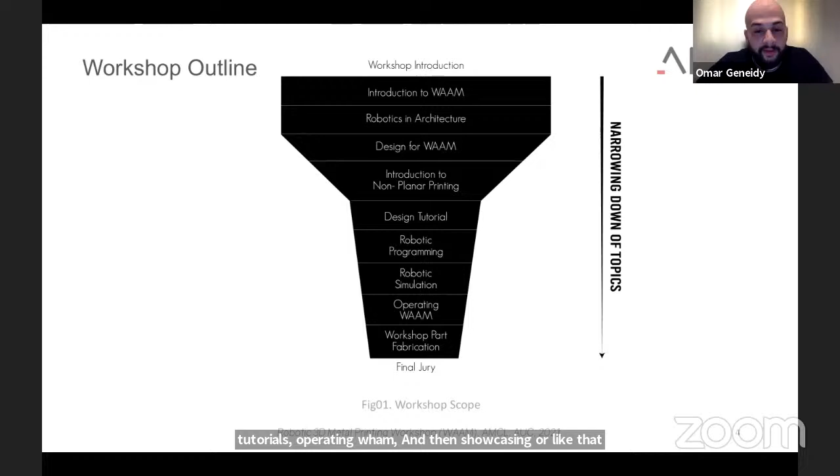Then we started digging into the tutorials: design tutorials, robotic programming tutorials, robotic simulation tutorials, operating WAAM, and then a showcase or lecture about the actual part that we fabricated at the lab.

This was the schedule. It involved two planned breaks for the participants to work on their projects. This was a hybrid workshop, done both online and at the lab.

So this is our lab. We have these two robots here: one that does the wire arc additive manufacturing, WAAM, and we have the positioner here, which is considered the third robot.

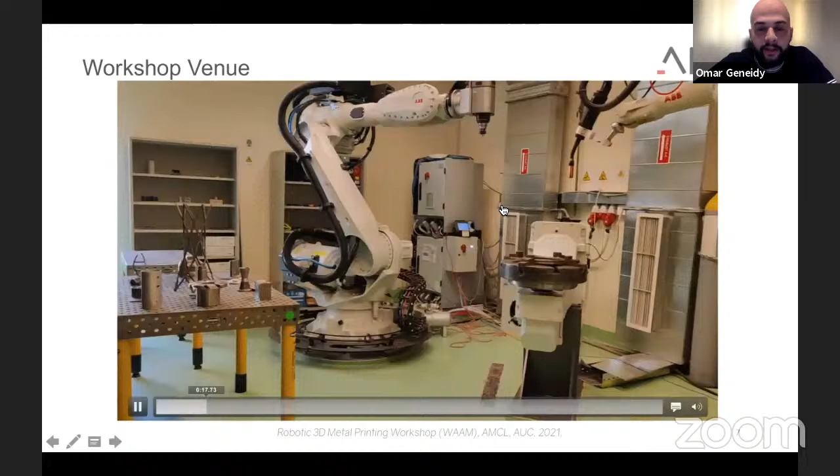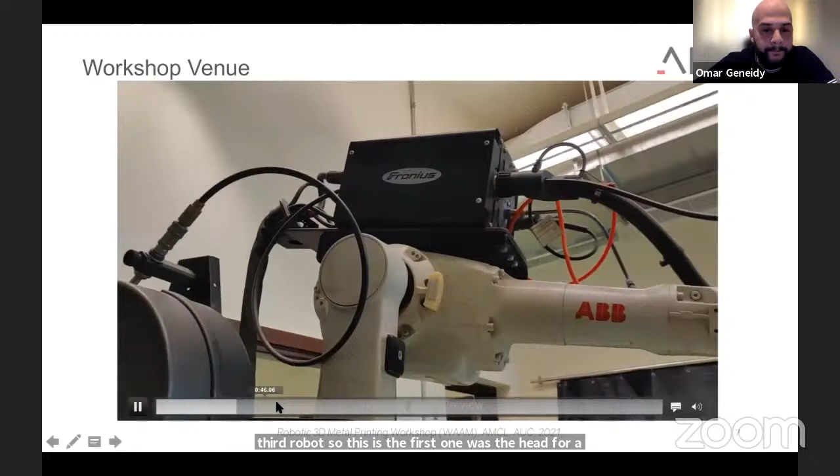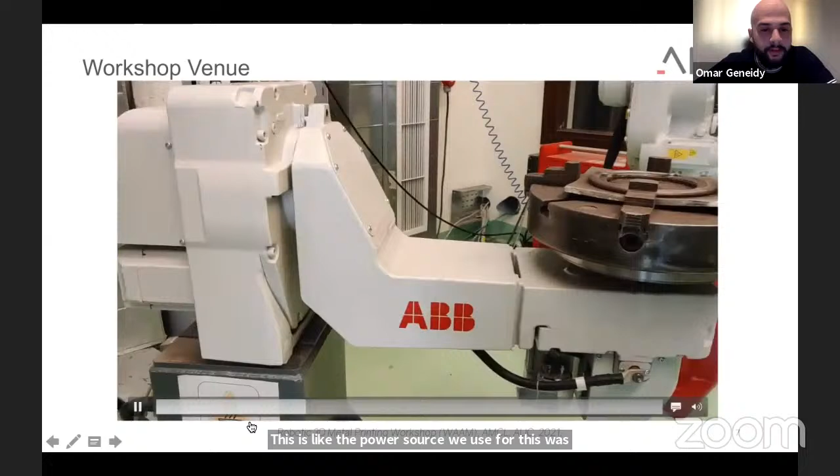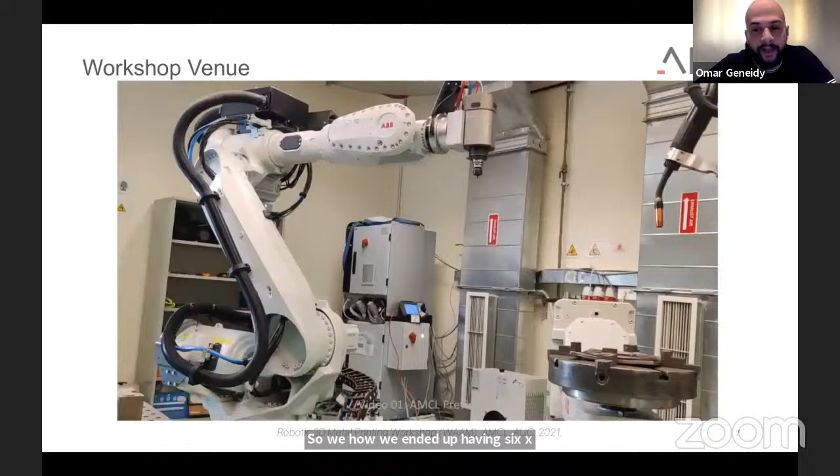This is the first one with the tool head for the wire for the WAAM, and this is the power source we use for this robot, and this is the positioner we use, which adds 2 extra axes for our integrated system. So we end up having 6 axes from each robot and 2 axes from this positioner, adding to our degree of freedom. We also have another robot which works as a subtractive robot, doing milling and surface finish for the parts that we print using the other robot.

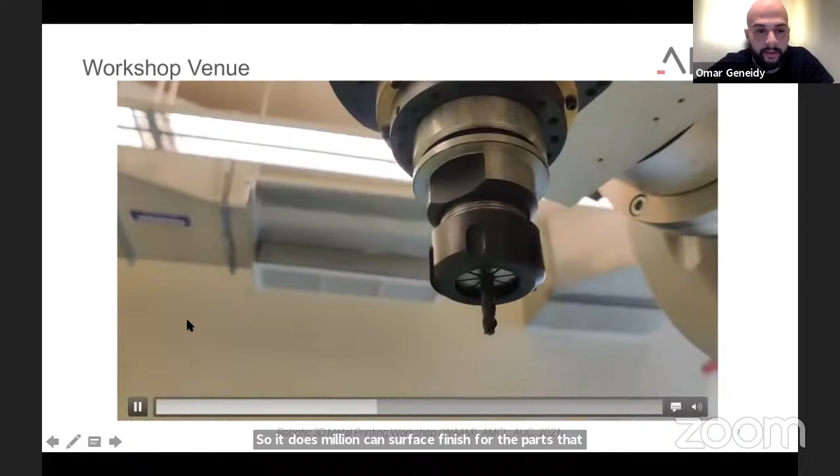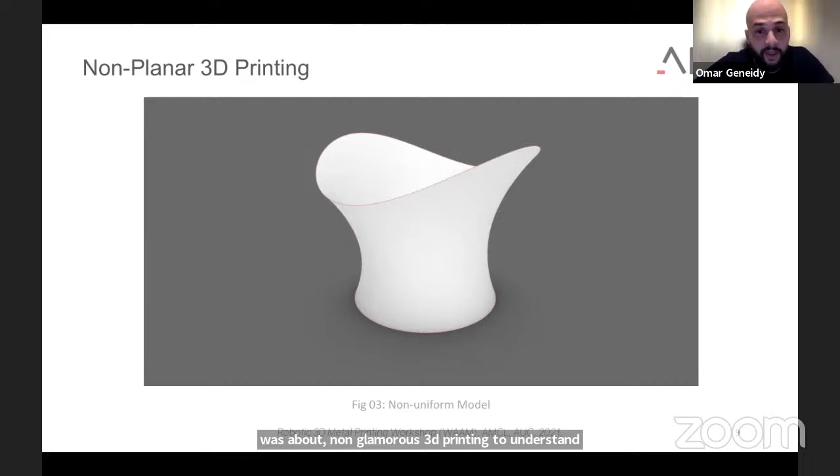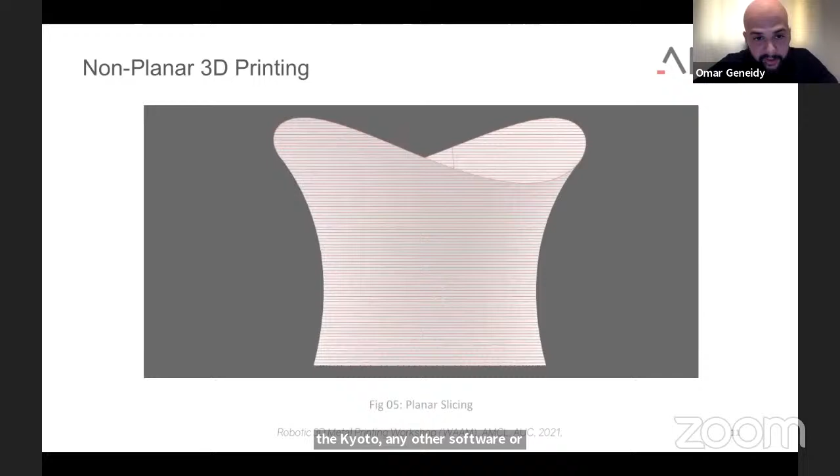So the main topic of the workshop was about non-planar 3D printing. To understand this, if you have a shape like this, you have different ways to do the slicing. The first one is planar slicing, the normal method you'd use in software like Cura for normal 3D printing. But the problem is that you end up with layers that start and end in a way where you have more layers in one area than in another, which creates problems, especially when working with WAAM, at the start and end of each print.

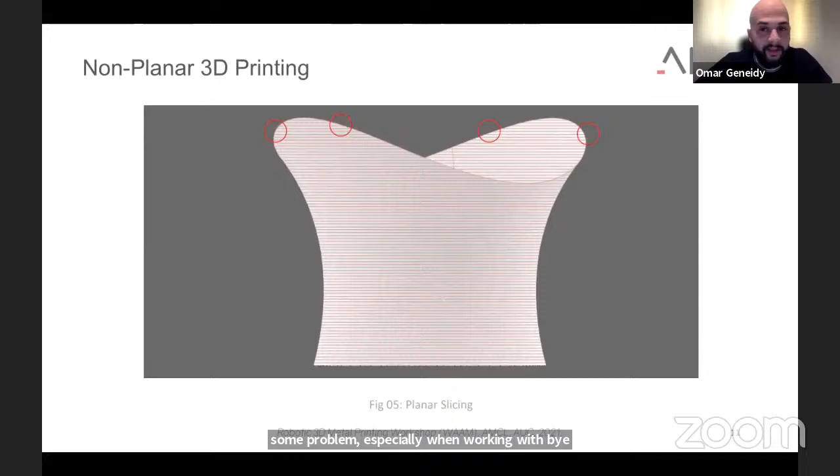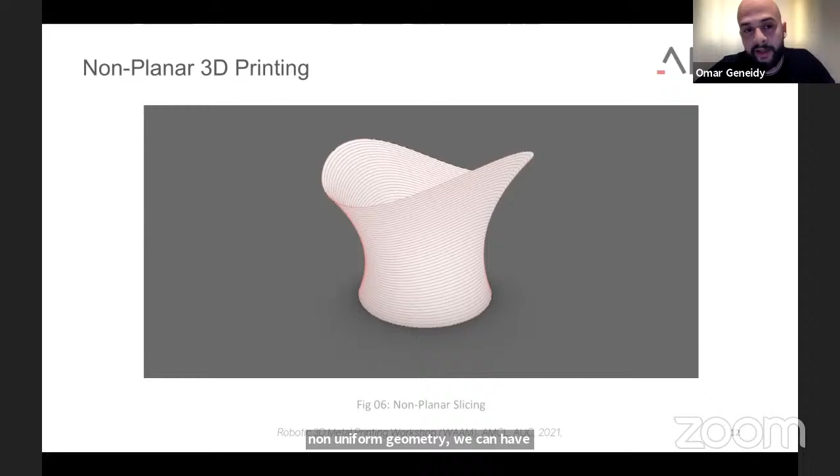So we try to introduce this idea of non-planar 3D printing by varying the height of each layer we print, so that for the same non-uniform geometry, we can have variation in heights without having to change the total number of layers inside it.

Of course, this is not a new idea, but it's there in concrete, it's there in clay, it's there in plastic. But when you're trying to do this with metal, it's very, very complicated due to the parameters and all of the stuff involved. So this was the idea that we were trying to dig deep into during this workshop.

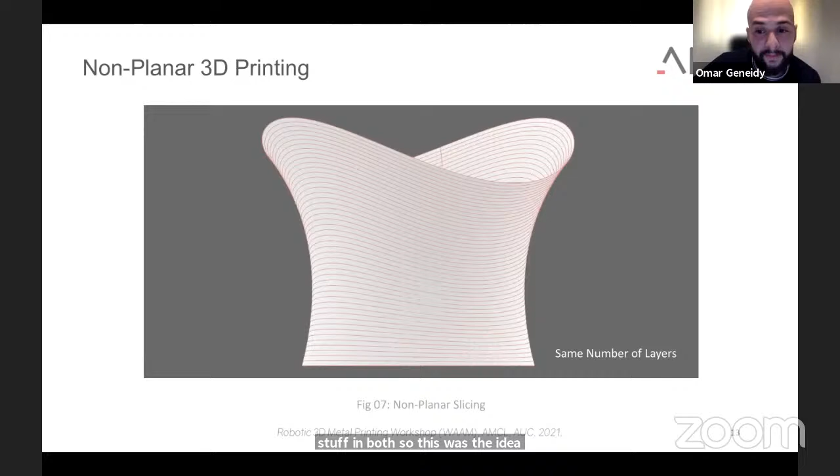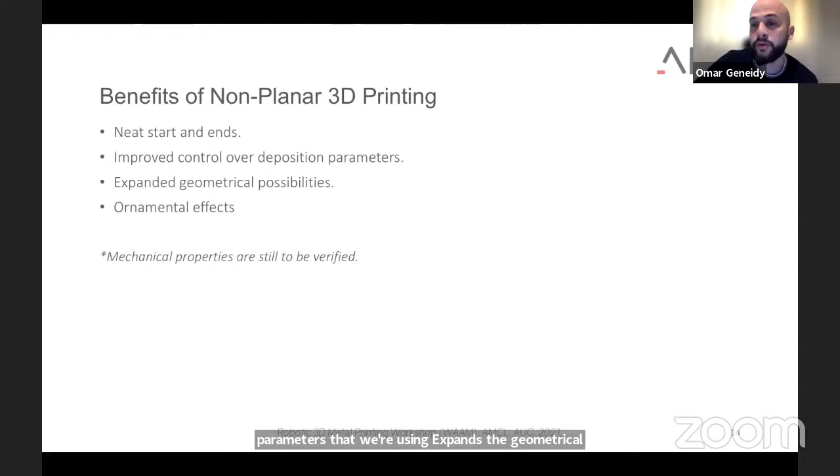It has a lot of benefits. It has neat start and end. It has improved control over the deposition parameters that we're using. It expands the geometrical possibilities, and it can also add an ornamental effect. Still, mechanical properties are to be verified as part of our research in the lab.

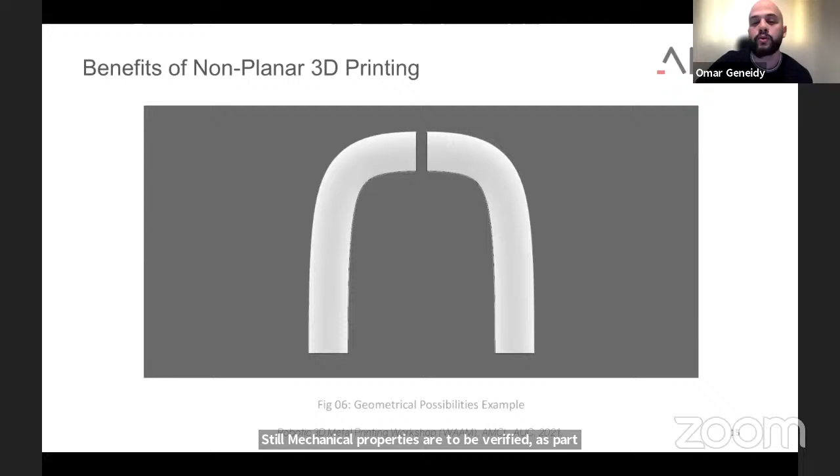Just a very quick overview of the geometrical possibilities. So if you have a shape like this, a tube, if you're doing a planar slicing, this is how you will end up slicing it, all of the layers parallel to each other. You will face problems at this part here, because you will need supports to do that. You can instead do it this way, so you have the layers sliced in this manner, and you will be able to print this kind of shape.

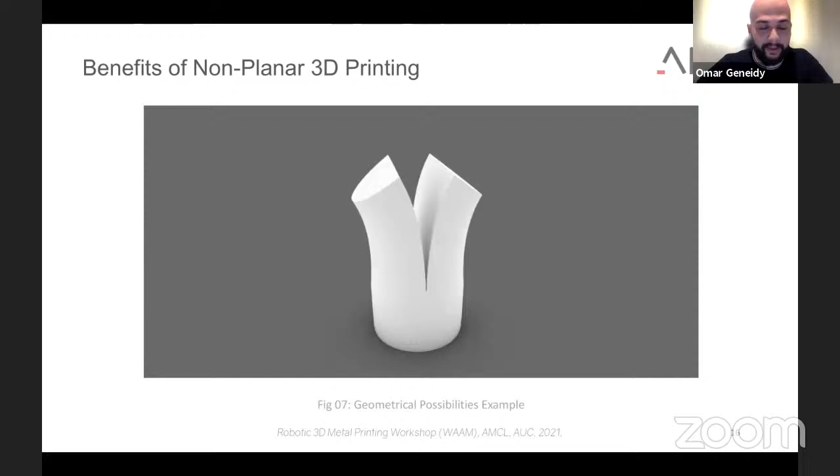You can also do some branching effects, and it could be mixed with planar slicing. I'm not going to dig deep into this because this was a whole session about this.

As I mentioned earlier, there's a difference between clay and metal, and why metal is far more difficult to achieve this with than clay.

Just a quick overview. In clay, you can slow down the robot, or you can elevate the tool head a little bit, and you can deposit more material, and it will fill the gap between the tool head or the nozzle and the print surface or the layer beneath.

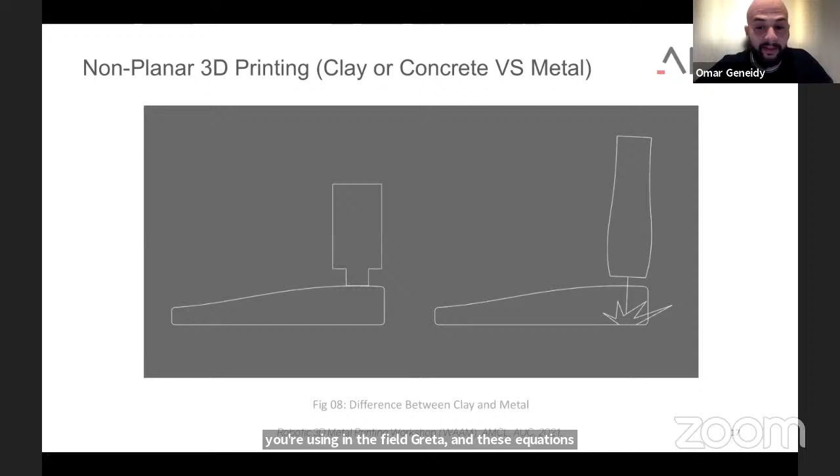With metal printing, the arc starts at the bottom of the layer. So you have to have the parameters or the data that generates the layer height that you wish to achieve. It has nothing to do with the height of the nozzle. It's all about the electricity that you're using, like the current, and the feed rate, and these equations that happen together, and the material that you're using. So this was why it was tricky.

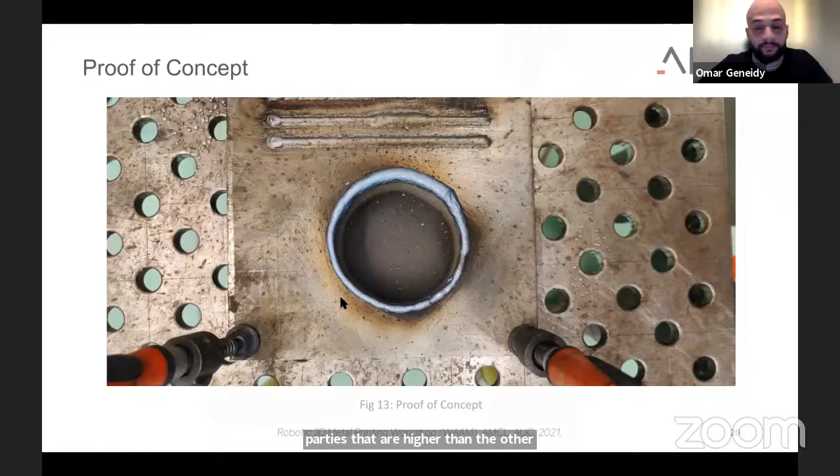During the workshop session, we started with Professor Hanadi talking about WAAM, what is WAAM, and talking first about additive manufacturing, then WAAM, and why WAAM, and all of the things related to that.

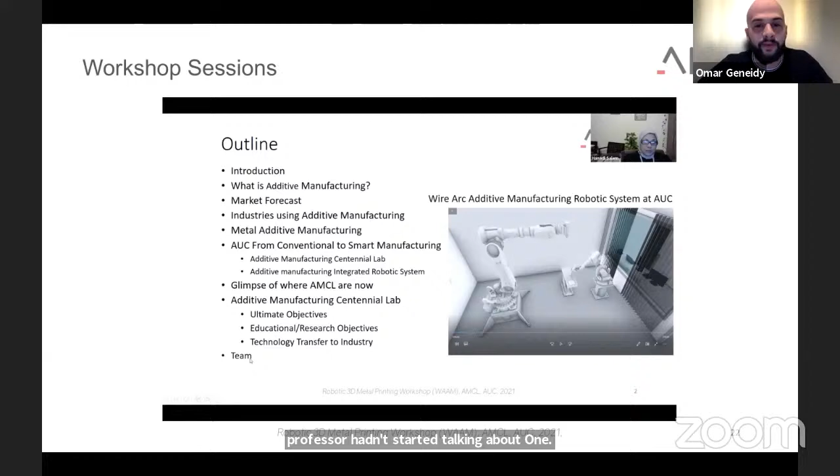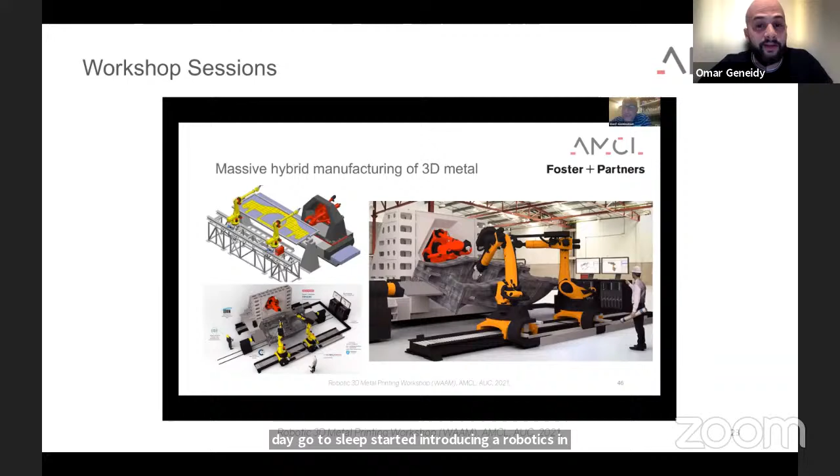And then the next day, Dr. Sharif started introducing robotics in architecture, and at the end, showing the potentials of using 3D metal printing in architecture.

We then started having Grasshopper sessions on the design, how we can design non-planar parts, and we did a quick revision on data tree structures, and then started working on robotic programming inside Grasshopper, two or three sessions on that.

And how we can optimize the robotic movement. So we're using this positioner, and this positioner rotates in two axes. So how we can use this to complement our fabrication process, making it much easier and optimizing our movement.

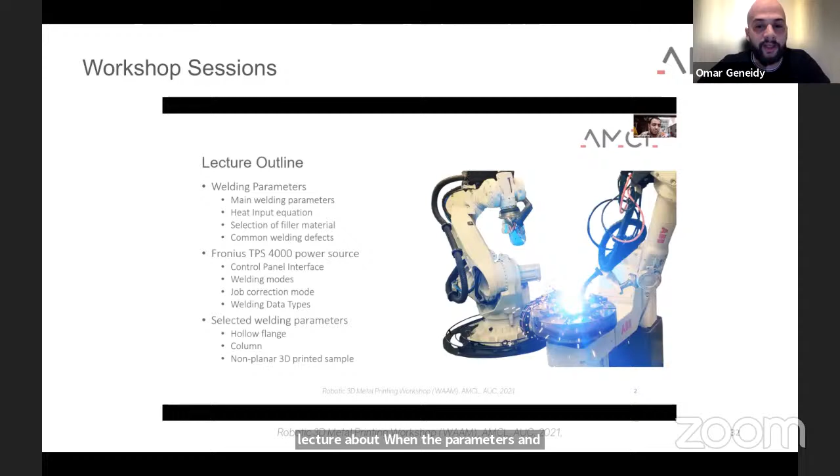Also, Engineer Ahmed gave a lecture about welding parameters and the power source we're using, and how to select these welding parameters, and also some instructions about how the robot moves in one line of code from one point to another.

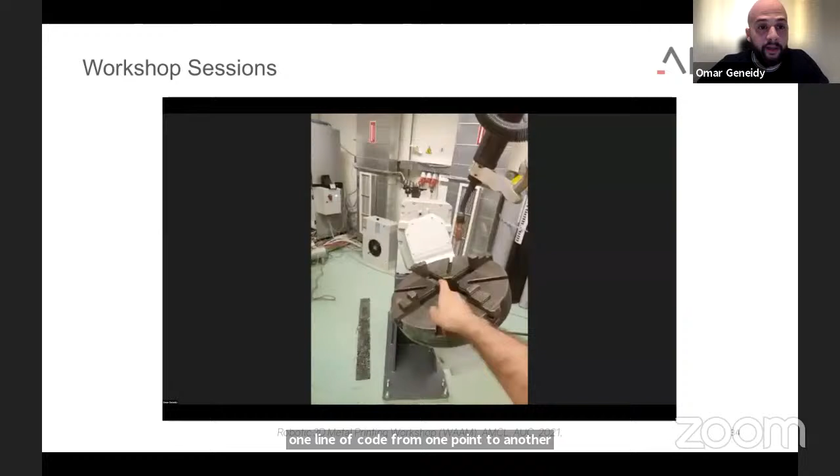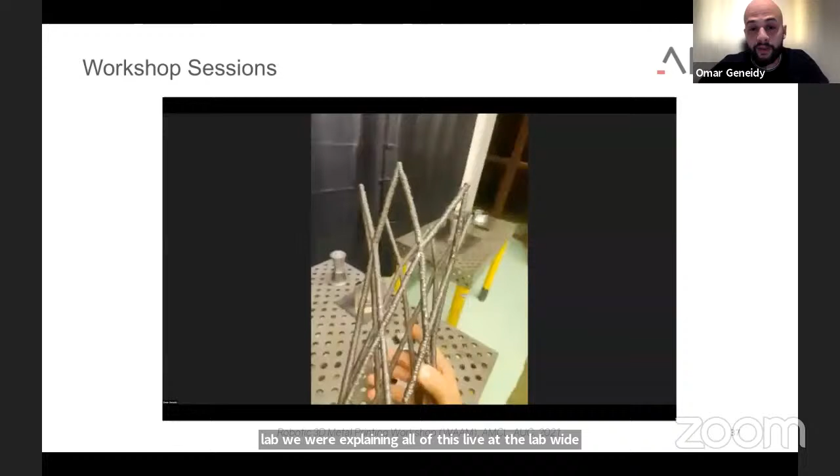And then in our live sessions from the lab, we were explaining all of this live at the lab while running the robots, and then explaining also using parts that we printed previously and the tools that we used, and talking about the process that we started making during the workshop.

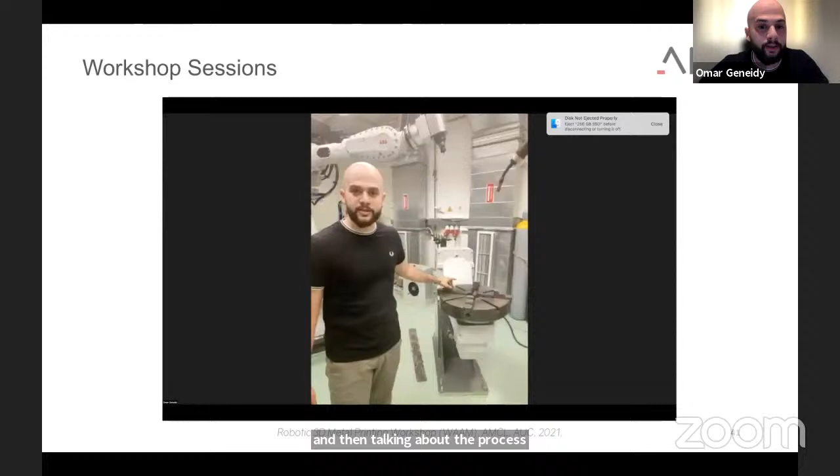We also had another contribution from Dr. Vittoria, who also did her PhD in WAAM, and started sharing with us all of the work that she did. And then many discussions with the participants and sharing of insights. So it was really nice contribution from their side.

So the workshop output, we started printing, depositing this part here.

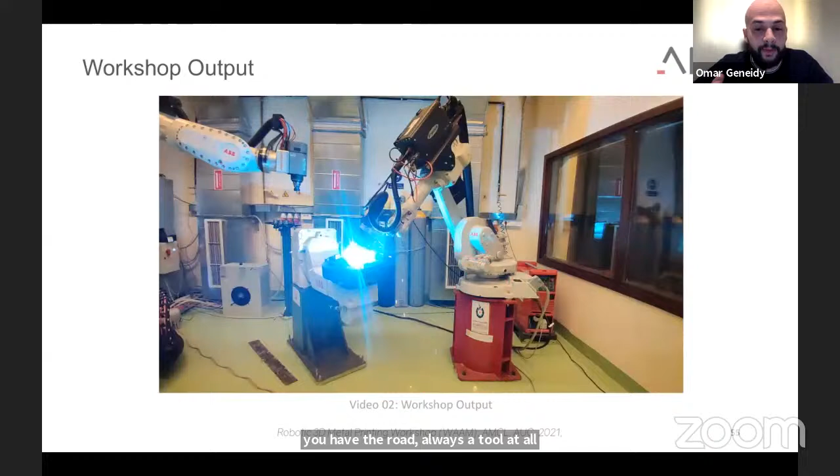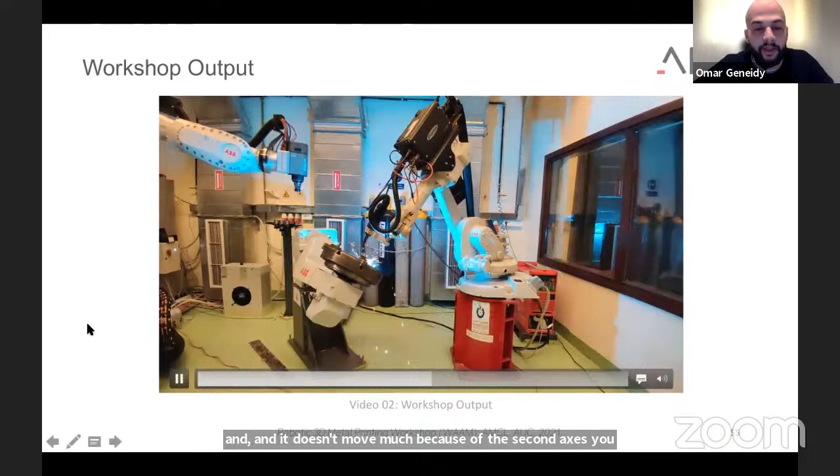So you can see here the robot running and depositing metal, and the positioner working in two axes to optimize the movement of the robot. The tool head is always pointed perpendicular to the layer being printed, and it doesn't move much because of the second axis, which rotates the robot and rotates every target to it, so the robot is optimized as much as possible, making the process faster.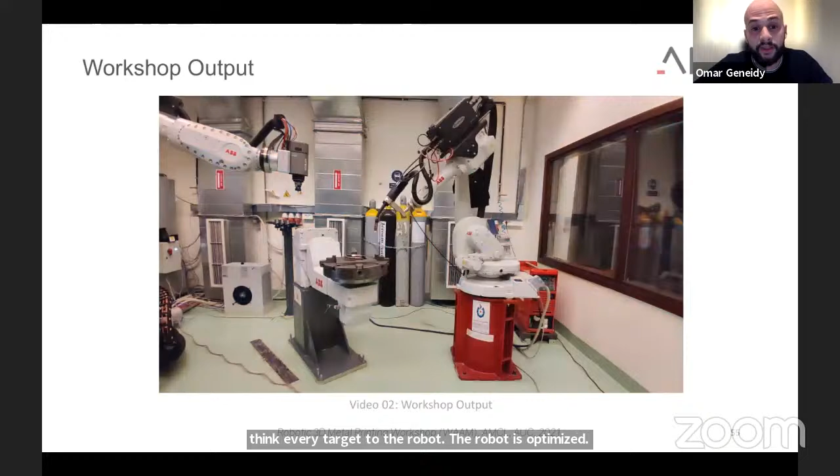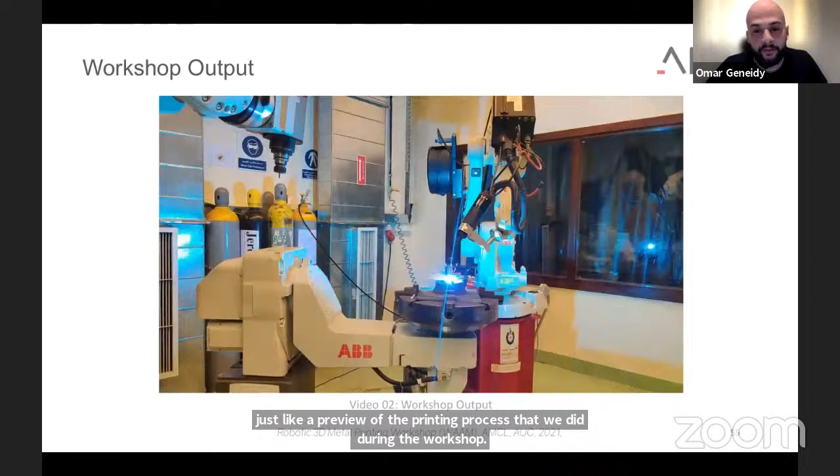This is just a preview of the printing process that we did during the workshop from different views. You can see the layers starting to build up, and the non-planar effect starting to accumulate at the end.

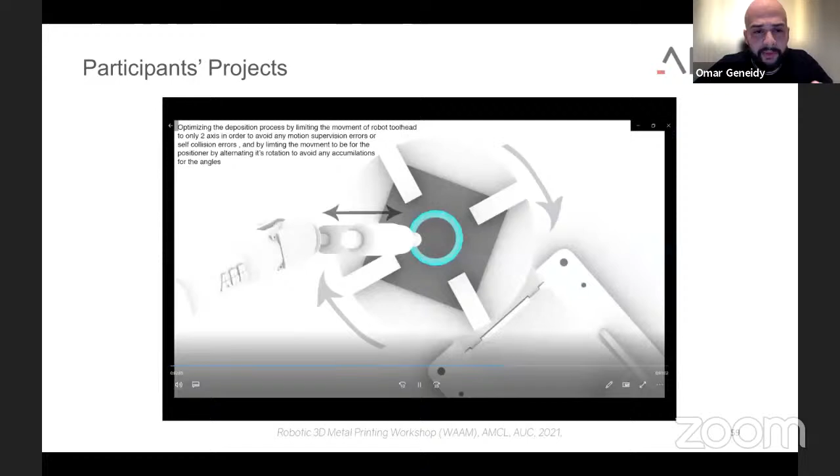We will be sharing more details regarding that in the following weeks. We had every participant working on their own project, so they all designed a piece and then generated the robotic fabrication code for this piece. We had a number of really interesting videos and projects that we will also be sharing later on.

Our next stages: we will have a summary video for the workshop, which will be shared on our website, amcl-auc.com. We are thinking of possibly having a publication about the idea of non-planar 3D printing and including the workshop output as part of this research.

We have another workshop planned coming up here in Egypt, an actual physical workshop, and we will be publishing parts of this workshop as a robotic programming crash course that will be available for anyone to see. Thank you very much, if you have any questions.

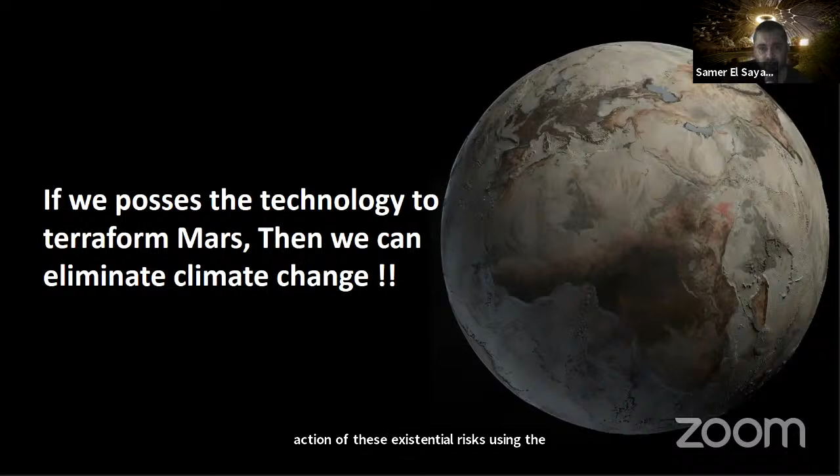Let me dig a little deeper into the design manifesto. I taught during this workshop 3 steps which I define as community-centered design. First, we are inspired by nature. As Le Corbusier once said, nature is always right and the architect is wrong. It's all about emulating models, systems, or elements inspired by nature. Nature is the mentor, nature is the inspiring model, and it gives us solutions to nearly any kind of engineering problem.

Nature is so much older than our human existence on Earth, and it managed to survive. According to anthropologists, our human race is 3.5 million years old, but nature is billions of years old. Earth was born billions of years ago and is still surviving. Our precedents were maybe dinosaurs and primitive life forms, but nature and trees have survived through millions and billions of years. So we have to turn toward these solutions, analyze and study them, and turn them into physical forms we can make use of.

Now the second part: experimenting and developing. We have today very high-value, cutting-edge technologies. I once heard Bill Gates in 2003 with a very interesting quote: the technology that occurred in the last year is equal to the technology that occurred in the last 10 years, and what happened in the last 10 years is equal to what happened in the last 100 years. And all the technologies we invented during our last 100 years are equal to the whole human race's technology and our whole humanity.

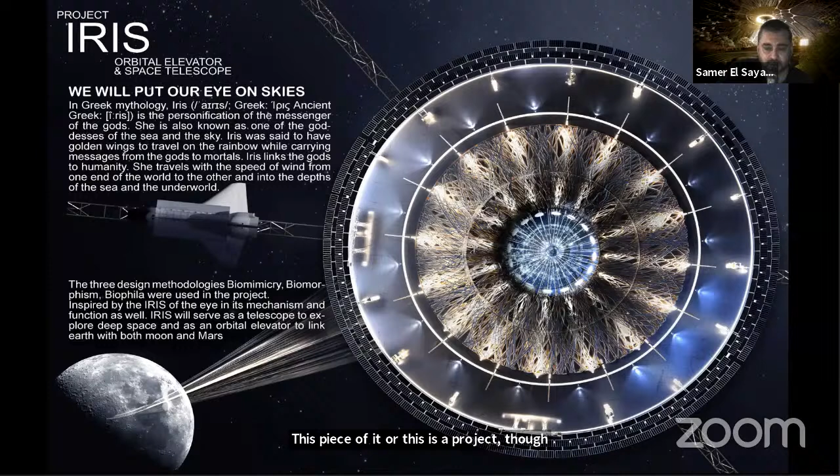The space elevator - this is a project that was awarded in 2020, just about 7 months ago. It is inspired from biomimicry. This project was developed and designed by a mix of digital technologies, biomimicry, biomorphism, and the biophilic.

So the mechanism of opening and closing of the lens - by the way, this is not only an orbital elevator, it is also a telescopic installation or facility that will be serving science and industry at the same time. The mechanism of closing and opening is inspired and developed from the muscles of the iris.

And the iris, by the way, the really fun part here is that one of the definitions of iris was the messenger of gods in ancient Greeks. So the space elevator will also be the messenger connecting different space communities and different human races in different planets and interstellar celestial bodies.

Here comes the second part with the biophilic, creating part of Mother Earth, which will be our ultimate legacy - something connected and hardwired inside our brains that we cannot really leave behind. So the underground part of the same project, the subterranean part on the lunar surface, is designed by importing part of the moon, of Mother Earth, with its terraced landscape.

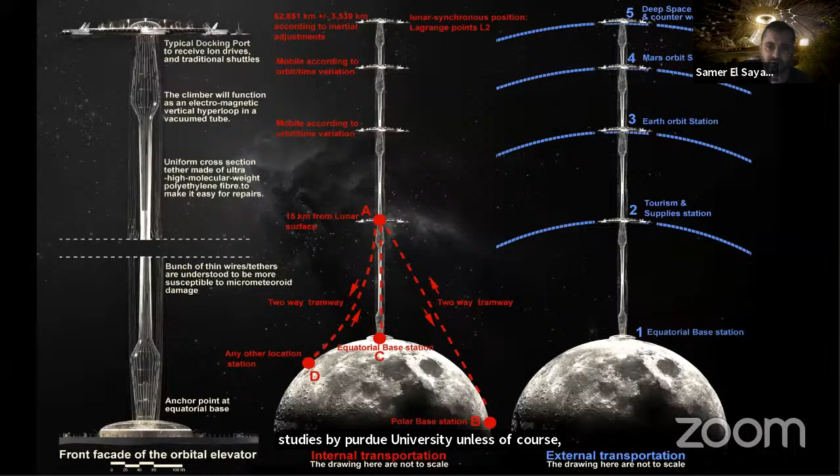It will be an internal and external transportation system: internal on the surface of the moon, connecting various parts of the planet or the moon, and also an external transportation system linking the moon with Earth and Mars, and maybe beyond. The power engineering systems were the really fun and exciting part here.

This workshop has only had a duration of 4 days, and during those 4 days, this distinguished group had succeeded and managed to produce the following projects.

That is a project by Suhaib. Suhaib Rahmani is from Iran, and he has fused time and space. He had this very interesting quantum approach of using time and space by having rotating habitats, producing artificial gravity and stabilizing human presence on the floating, orbital part of the space elevator.

Moving on to Walter. Walter is an experienced architect from Peru. He used the dandelion as a biomimicry approach for creating his space elevator.

I would like to mention that these are very brief slides of the results of the workshop. Each one of them had really dug deep into a very high level of research before generating their solution. We discussed the solutions, and it was very interesting to have the power of all of the minds, unlocking synergies between the group for the end result of this workshop.

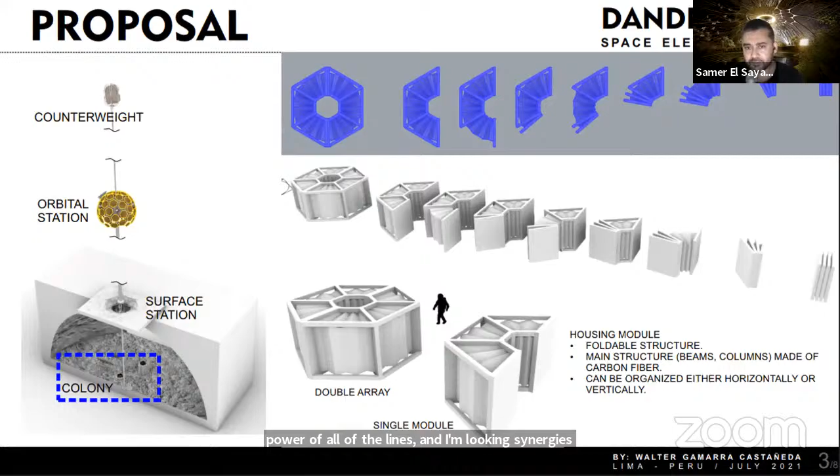Also, Yasmin is a graduate from the American University in Cairo. She had clustered her habitats in a modular and composable design, after understanding the differences between modular design principles in engineering and the composability and synergies that could be done. She went so far as to design the single unit, its air-locking system, its window, and the external structure that will carry and protect the internal unit.

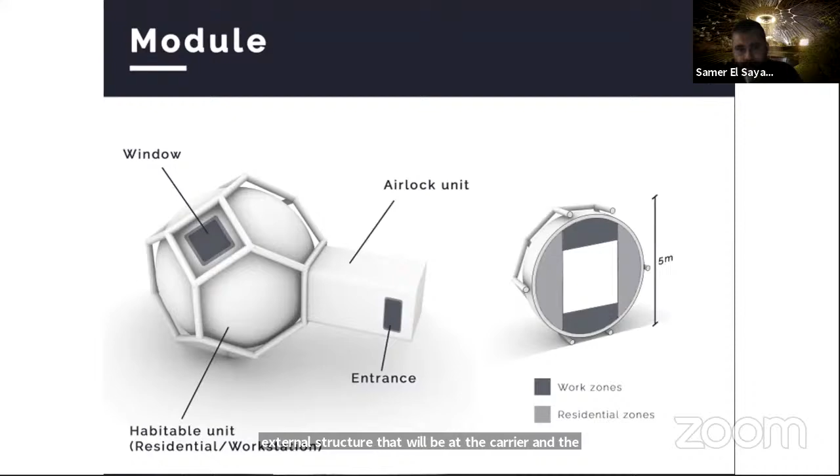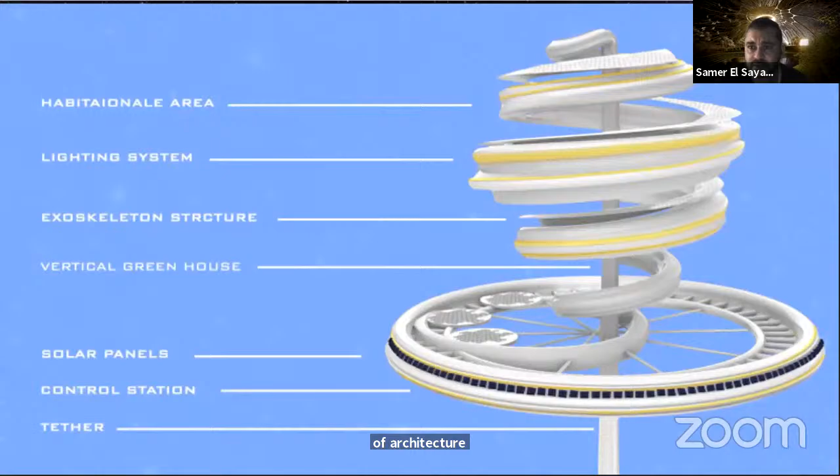And Valentina Pruselli also had produced something very interesting, linking the craters. She went a little bit outside our approach of using the lunar lava caves, and was more interested in exploring the craters on the lunar surface.

We left her the freedom to design her space, but accordingly, she had to dig a little deeper in the research to convince the whole group of the cost effectiveness and the scientific and implementation effectiveness of her design solution. She also thought about the movement mechanism linking the orbital station with the terrain station.

Also, Aline had interestingly made a set of orbital elevators, resulting in a parallel community linked together parallel to the lunar surface. She had subterranean communities and orbital communities with expansion possibilities, done using the modular design of each space elevator, and having a cloud cover covering the lunar surface with these modular units.

Now turning to Ethni Zhu. Ethni Zhu is also a graduate from Yale University, and she interestingly started by thinking about the inner solution of the vehicle that will be linking the subterranean or terrain stations with the orbital stations, and how it could safely host the crew moving at very high speed in a very low gravity environment between both stations, the orbital and the terrain one.

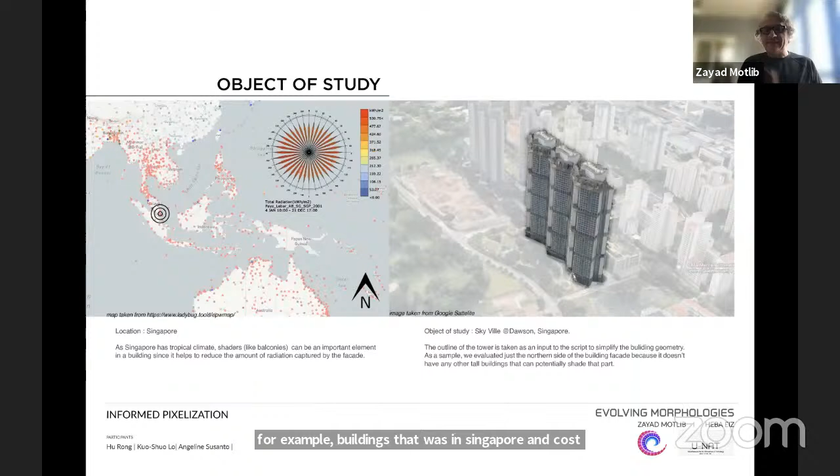Construct a problem. We thought we'd unskin it first, leaving only the structure, which is floor plates and columns, and then design a new skin for it based on particular performance objectives.

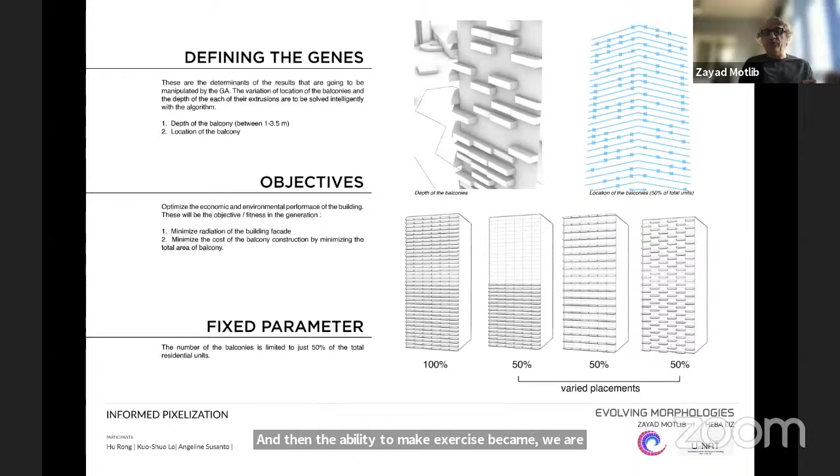In this case, they wanted to reduce the radiation because they thought the facade facing the park, the main important one, is the one that has the highest radiation. The algorithmic exercise became: if we propose 50% of balconies on that elevation, each varying in depth between 1 to 3.5 meters, the algorithm will figure out positions of these balconies with varying depth to give minimum radiation.

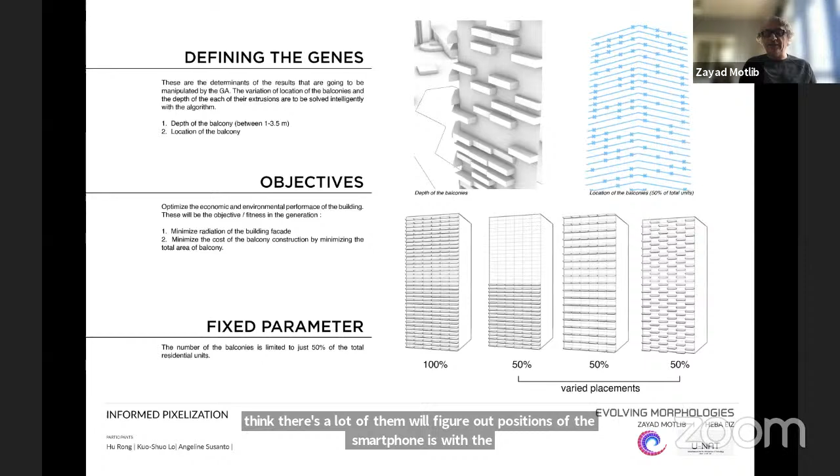So they learned how to define their genes, what are the objectives, and how the algorithm will create different generations, each proposing different balcony positions and projections into the elevation. So it became what looks like random pixelization, but actually it is informed by certain performance criteria that drives the aesthetic or arrangement behind it.

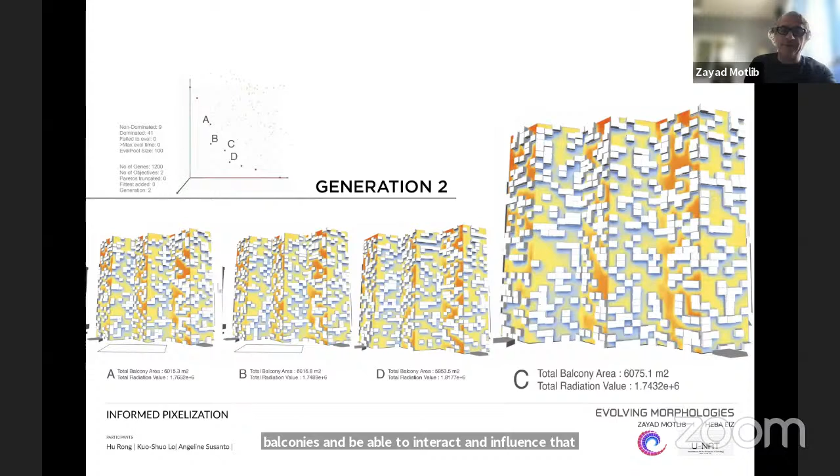So that's generation 1, generation 2. The project moves forward when the subjectivity of the architect comes in and says, I really like that, or I want to understand how the algorithm is proposing the balconies, and be able to interact and influence the project towards something aesthetically appealing. So that would be just phase 1 of the process we're working on.

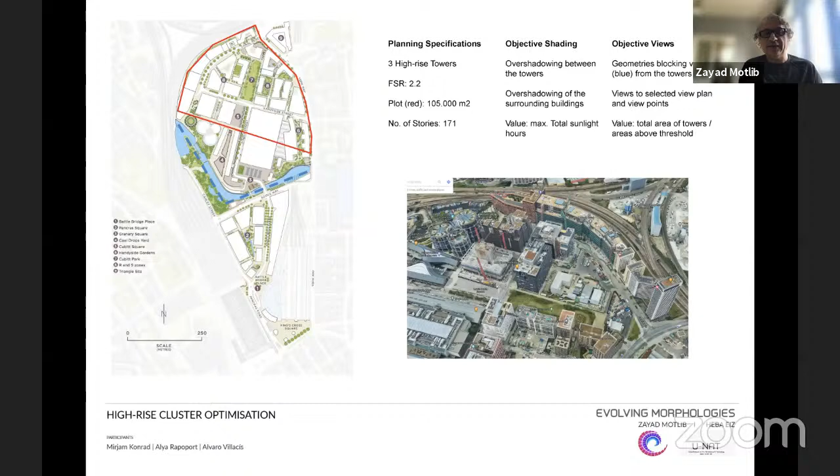The other project moves from a single tower to a group of towers. This time the participants selected a site in London, wanting to propose 3 high-rise buildings. They started with a generic shape, a cylinder high-rise, and the first thing they wanted was for the algorithm to figure out a combination or way of organizing these towers to minimize overshadowing of each other. The algorithm tries different placements and heights to figure out which iteration gives minimum overshadowing.

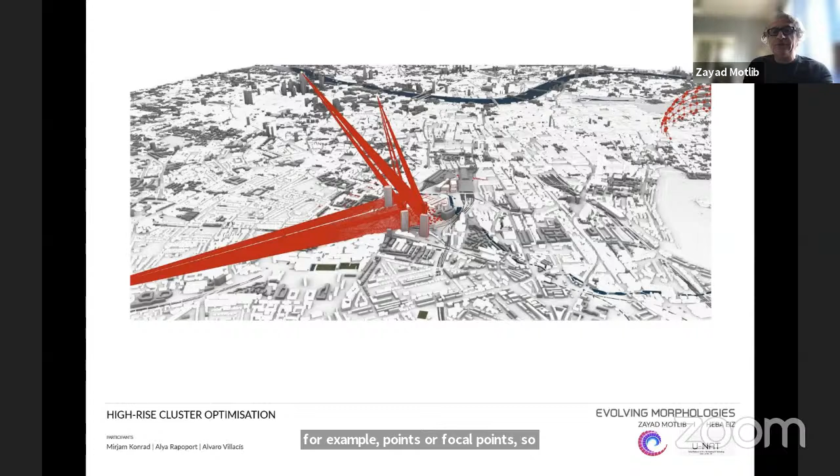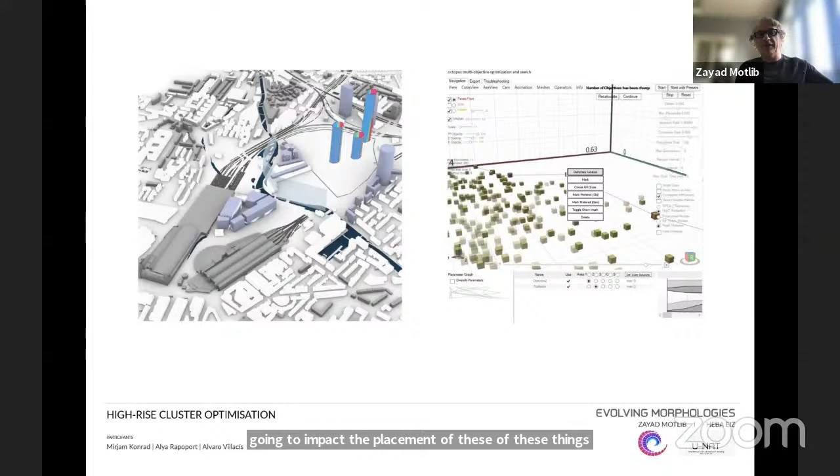With the minimum overshadowing achieved, they introduced another objective: having the best views to certain London points or focal points. So they studied the conflict between overshadowing and views, and how that would impact the placement of these towers, which is very much the first step you take with a project like that.

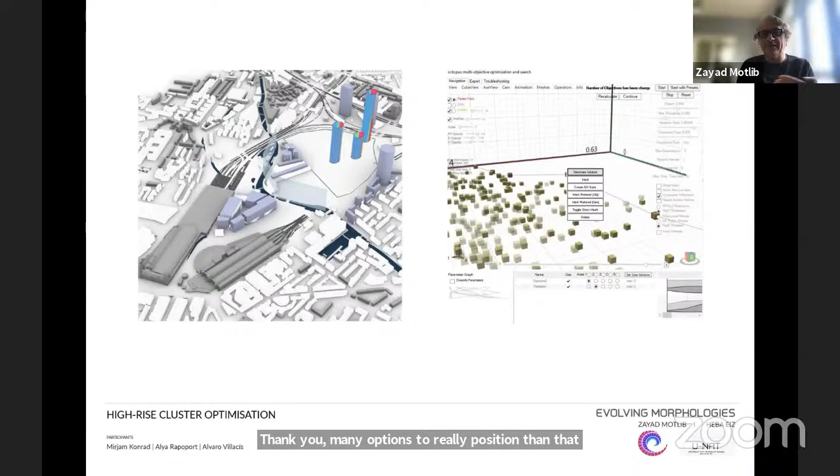When architects do it manually, they position towers in a way they think is best. Here, the algorithm can give many options to really position them, and the architect selects the one they prefer. From there, they take it to the next step, the morphology of the tower itself, introducing rotation and giving it character based on the architect's preferences, knowing the best positions. Now, what is the best morphology that can reinforce their selection?

So from a multi-story urban application, we went to a completely contrasting one: the daylight pavilion, taking a small site, 20 by 20 meters, in a park in Iran, since the participants were Iranian. What they wanted to do is figure out a shape or geometry for the roof, for what is going to be a study hall.

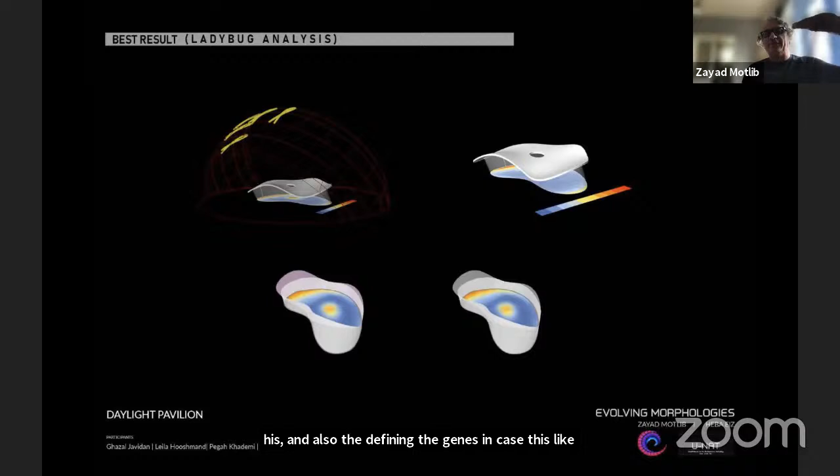They wanted to figure out a shape for the roof with an overhang that gives zero glare inside, so the roof could take different shapes, geometries, and overhangs. What gives you zero glare? So the geometry of the roof, although it looks organic and curvilinear, is actually informed by certain performative criteria. The algorithm tries to optimize this by defining genes such as the cantilever, the height of the roof, and the overall geometry, optimizing it towards producing zero glare inside.

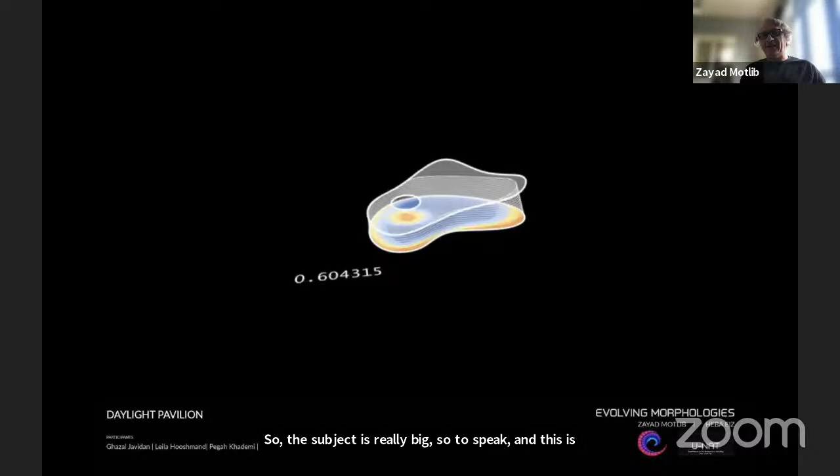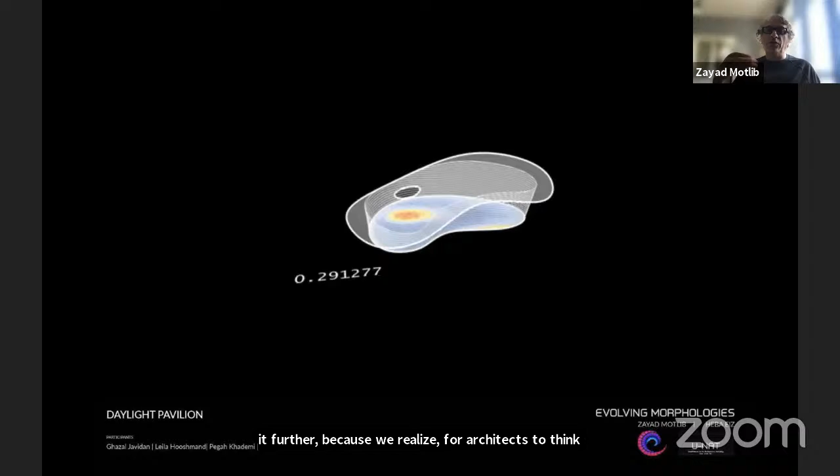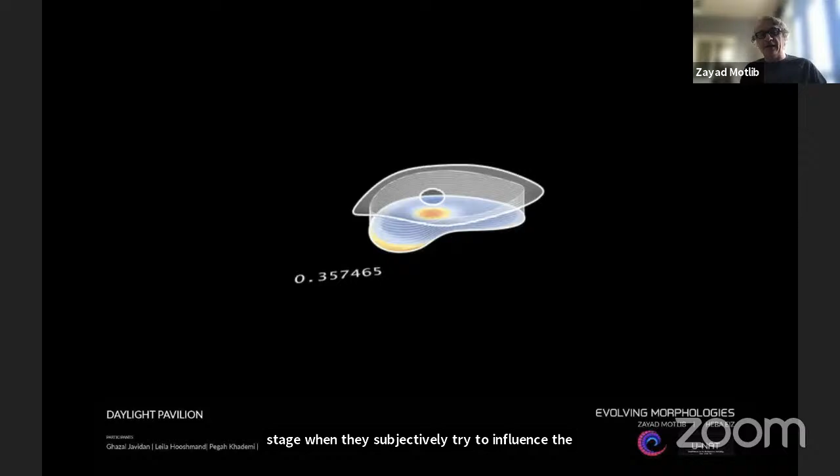So the subject is really big, so to speak, and this is only like one slice at it. We weren't able to push it further because we realized architects thinking of design in a more evolving method rather than generating design solutions immediately took adjustment to the way of thinking of the participant, which kind of hindered taking them to the next stage when they subjectively try to influence the direction of the evolution of the algorithm, and test whether architects can really influence it, how much they can influence, and where that influence is going to take them.

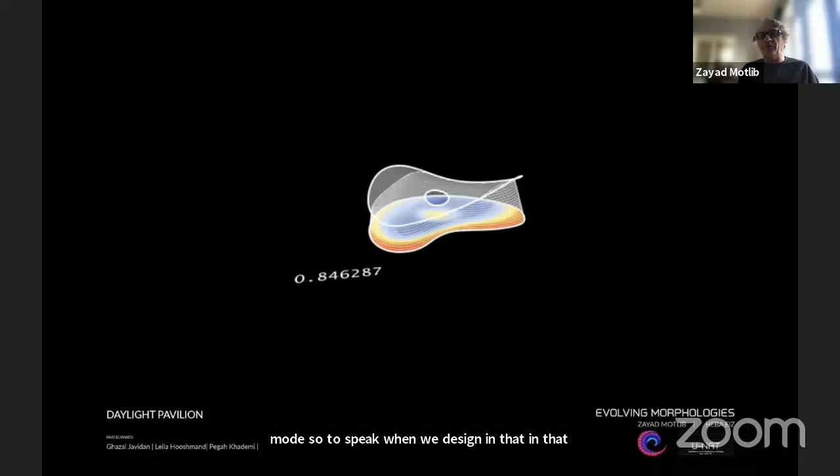So the idea is that we take something very objective, which is the genetic algorithm, and we introduce our subjectivity or preference, which is the dominant mode so to speak when we design in the generative mode, and see where this intersection of two methods were driving the solution towards.

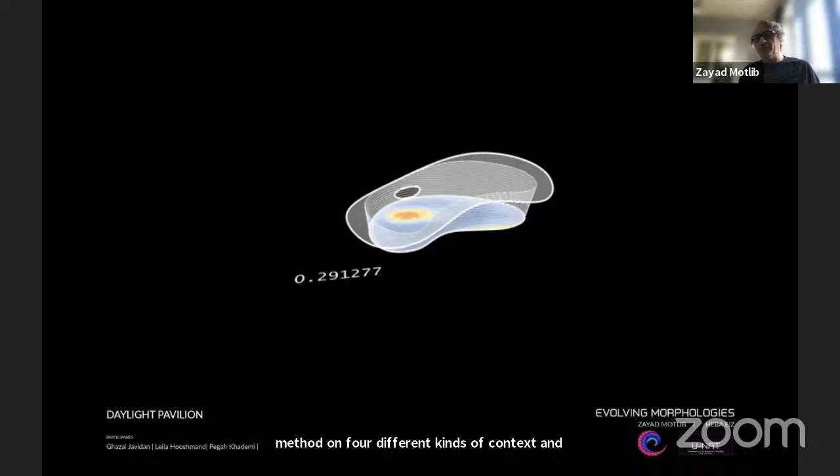As I mentioned, it's ongoing, and it's part of research that I'm currently doing with Heba. That was the first step, testing this method on 4 different kinds of contexts. We look forward to the next version of this workshop when we introduce that interactivity. So I think that's it. Thank you.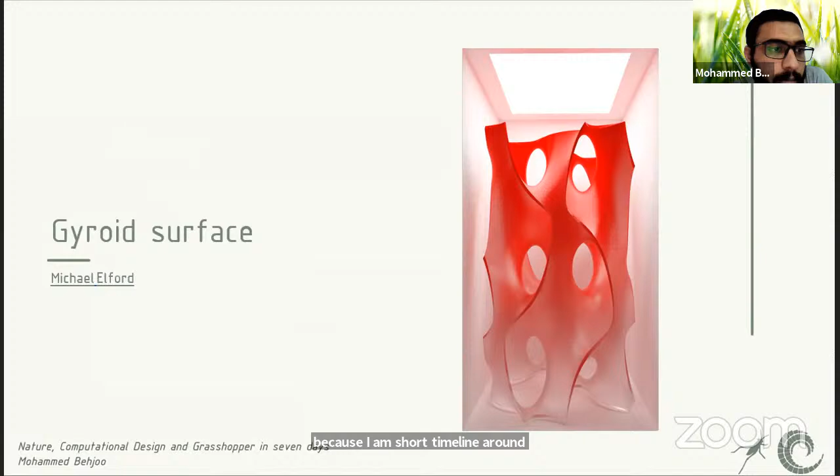I'm not going to go into more detail because I'm short on time. I have around 10 minutes, and I should present both my workshops. So I'll skip these parts and go to this part, which is a very short video.

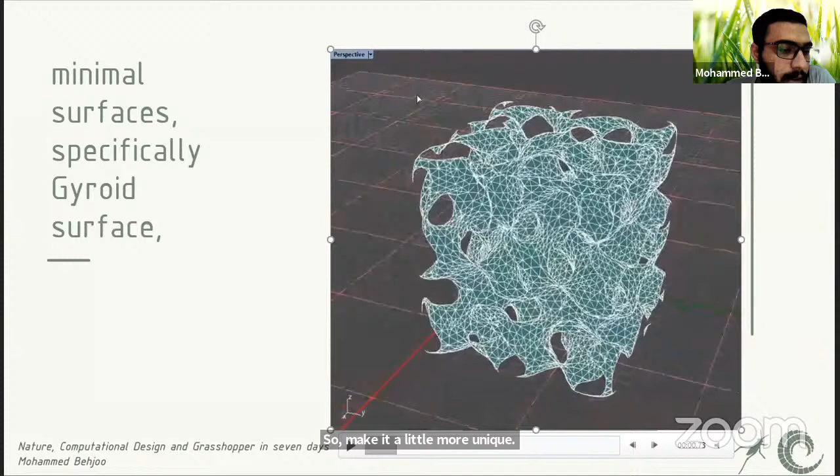And our other topic was mechanisms and kinetic structures. We know moving or kinetic structures consist of some mechanisms, and in engineering, a mechanism is a device that transforms input force into an output force.

We know that a mechanism is a device that transforms input forces and movement into a desired set of forces and movement.

And a kinetic structure consists of so many of these mechanisms, so many kinds of these mechanisms. We know a person named Theo Jansen, who made some interesting kinetic structures that can actually move, and it's a very interesting opportunity to implement this.

Implement his designs, his structures that we call strandbeests in architecture. And we discussed some of the advantages and disadvantages of his design in the architectural realm with our students. It was a very interesting discussion.

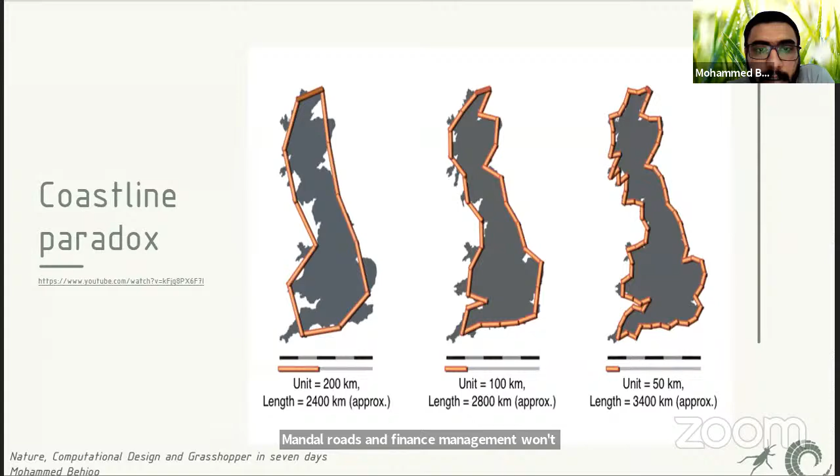So I guess Benoit Mandelbrot has expanded this problem and has some definitions for this. Mandelbrot is the person who has the Mandelbrot set of fractals.

After that, we went through some topics like game of life, 3D cellular automata, L-system, dragon curve, and mathematics of chaos. It was a really funny and interesting session.

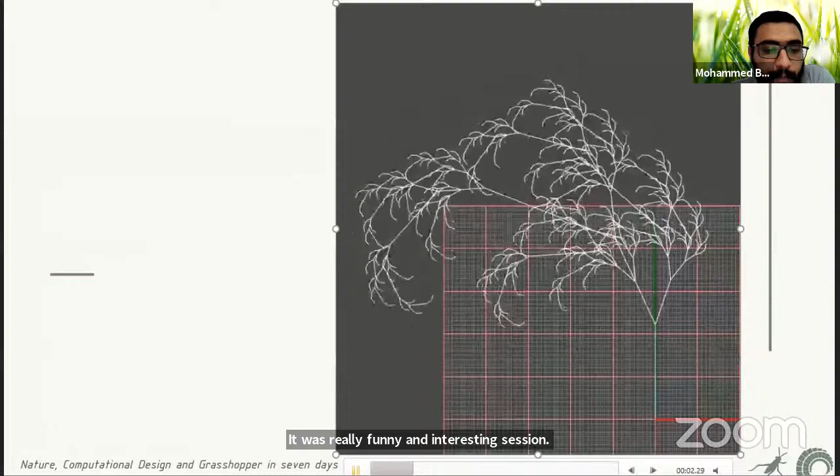One of the students has implemented this fractal tree using a Rabbit component, implementing L-system principles in Grasshopper. So after that, our fifth session was about this question: what is a sequence, and what are the examples in nature?

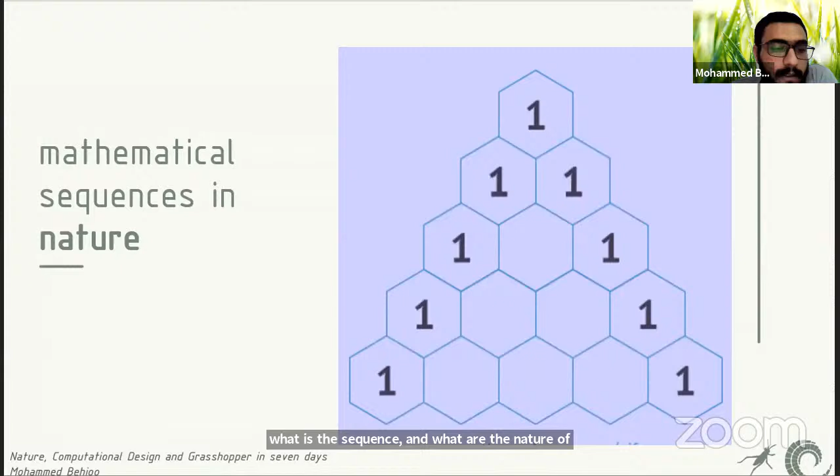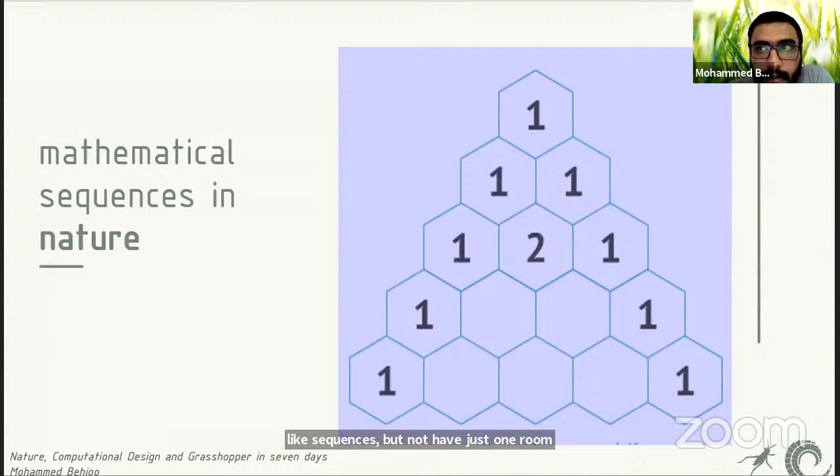And the definitions of sequences, like being infinite or finite. When the sequence goes on forever, it is an infinite sequence. Otherwise, it is a finite sequence. Also, sequences don't have just one rule; they have so many rules that define a sequence.

We talked about Fibonacci numbers, Lucas numbers, the golden ratio, and its roots in ancient Greek and Roman architecture and arts, and types of sequences such as arithmetic sequences, geometric sequences, and triangular numbers. After that, our discussion moved toward more geometry topics, like hyperbolic spirals, Fermat spirals, parabolic spirals, and other kinds of spirals, and what the differences between them are.

This is a grasshopper script that one of our students have written, so that we can have a large variety of sequences and spirals with just a very short script in Grasshopper.

I think most of you know where this location is. It is Black Rock Desert. They have an annual festival called Burning Man. This guy is playing with a tensegrity structure.

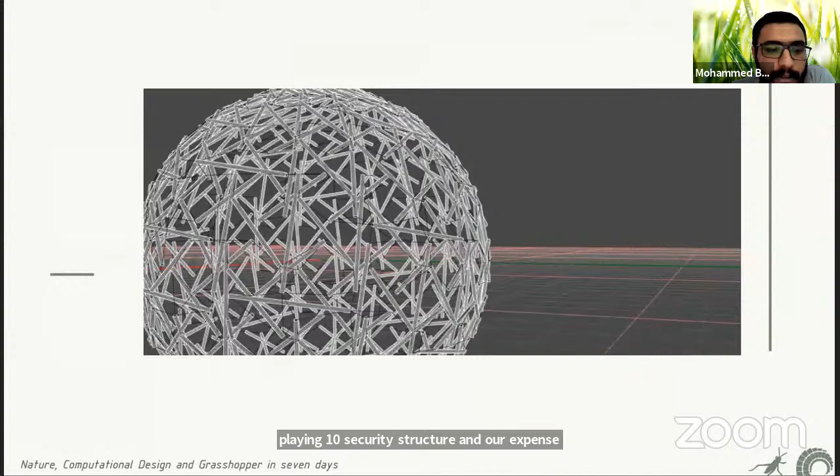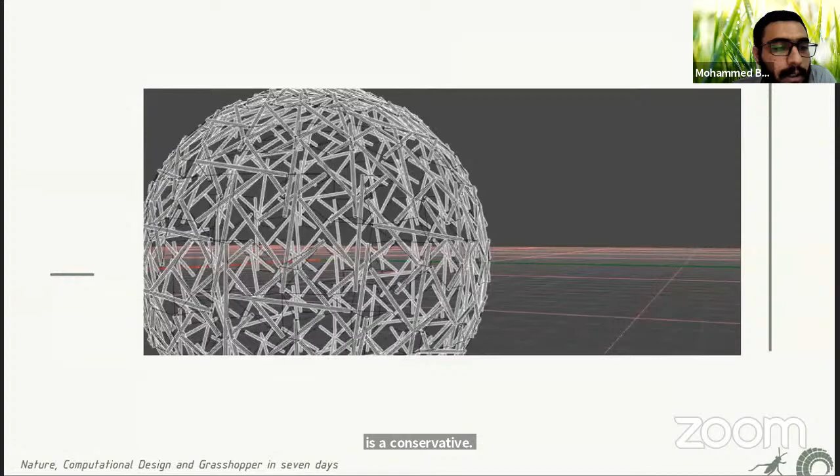Our sixth session was about tensegrity structures, and this is an example of what we implemented in the Grasshopper environment - that is a tensegrity dome, which relates to our next topic: membrane and tensile structures.

Tensile structures are one of the unique complex structures. Its structural members can only carry tension, with no compression or bend. It normally consists of exterior fabric material with a framework such as cables.

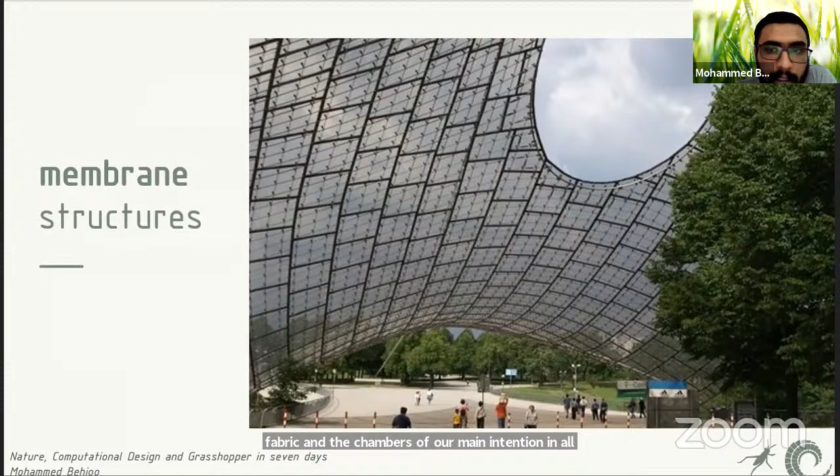So they are very efficient in structural performance. The fabric and the cables are maintained in tension in all directions to provide stability. Membranes are one of the common fabric materials used in nature, and we see them in our day-to-day lives.

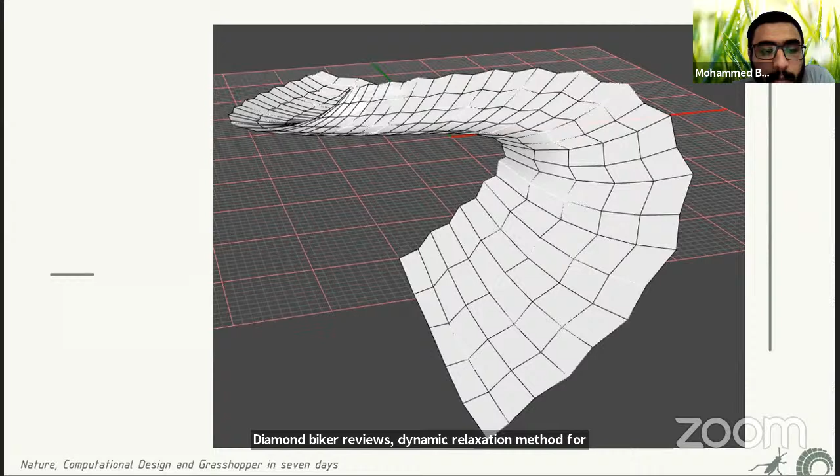It is developed by Daniel Piker. We use a dynamic relaxation method for load simulation, and some of the students use it as their main tool in their toolbox.

My second workshop was artificial intelligence in architecture, exploring GAN. It was a more advanced level workshop, about artificial intelligence, as the name suggests.

We went through basic concepts like what is AI and the difference between various forms of AI, like ML, machine learning, and deep learning. We continued to explore more advanced topics like generative adversarial networks. The workshop started with basics of artificial intelligence and moved to advanced topics like generative adversarial networks.

The discussions and teachings covered a summary of artificial intelligence, machine learning, and deep learning, a brief mathematical explanation of neural networks, building blocks like layers and neurons, getting started with neural networks in TensorFlow and Keras, and the basics of machine learning and how they work, because it is like a black box.